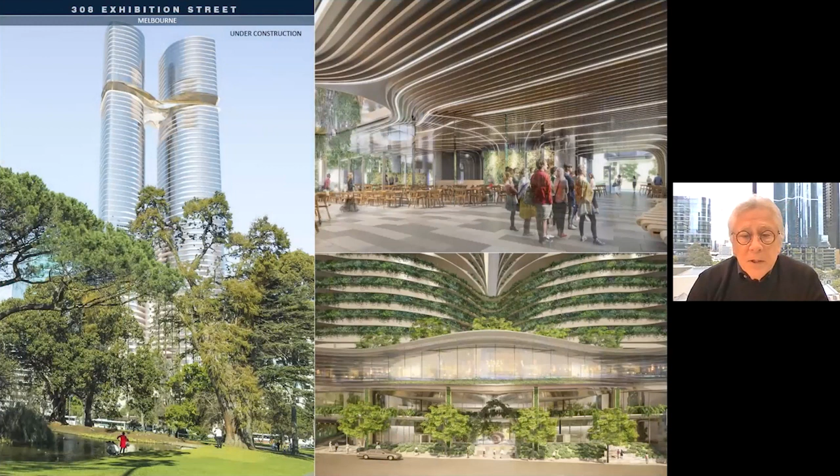Next door to it and behind me is Australia 108, which saves a heritage facade and has a lot of planting to the car parking lower component of the building. It has a sky deck, which gives everybody in the building an equal opportunity for view because it contains all of the public facilities. And another project that we're doing with Cox in Melbourne, again, a lot of attention to the ground plane, a hotel and residential tower.

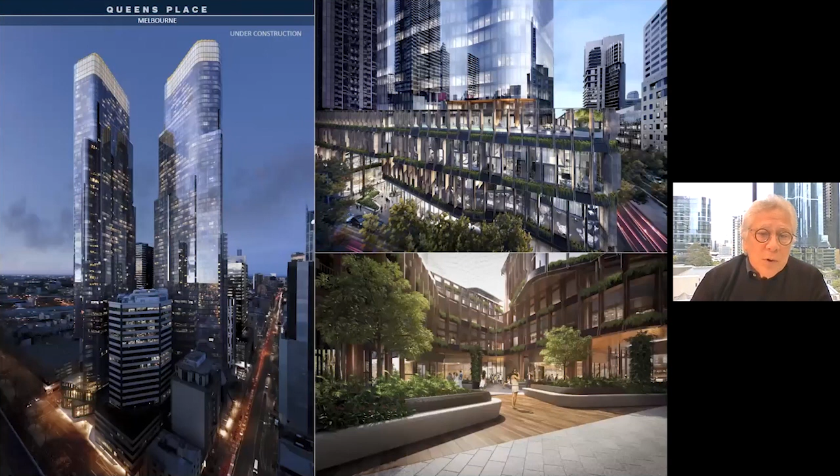And finally, Queens Place, again we're doing this with Cox, they're good friends of ours, and a lot of attention to the ground plane with serviced offices, studio apartments, etc., connecting into the fabric of the city, but creating the skyrise elements which can be seen from afar and which add to the character of the city.

We received the invitation in 2010, and construction actually started in 2014. There's a lot of proximity between Kuala Lumpur and Australia—a 7-hour flight, not too bad overnight, and a 3-hour time difference for calls, etc. So it really was quite an easy process in terms of those sort of logistics.

The city of KL is just quite remarkable. It's an organic city in the road networks, in the way it's evolved. And as Carol just mentioned earlier, some major buildings have now popped up, as it were—the Petronas or KLCC Tower, the KL Tower, an observation telecommunications tower, TRX recently, and our Merdeka 118 on the right-hand side. I think these are characteristic of Malaysia becoming part of the international development of cities.

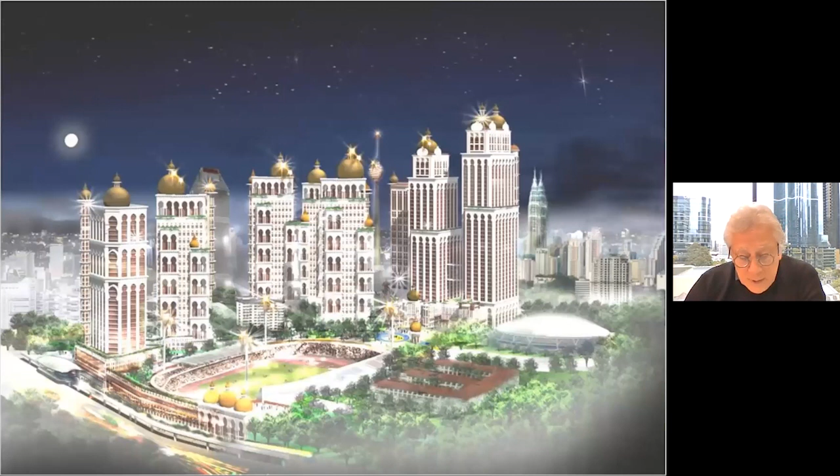And this was it. You can see from this approach, this sort of use of Malaysian Islamic architecture, extruding it from a village campus type of background, was, I suppose, to relate to the heritage of the site.

But really it wasn't so much about providing the potentials of public advantage. You can see the sort of campus layout here.

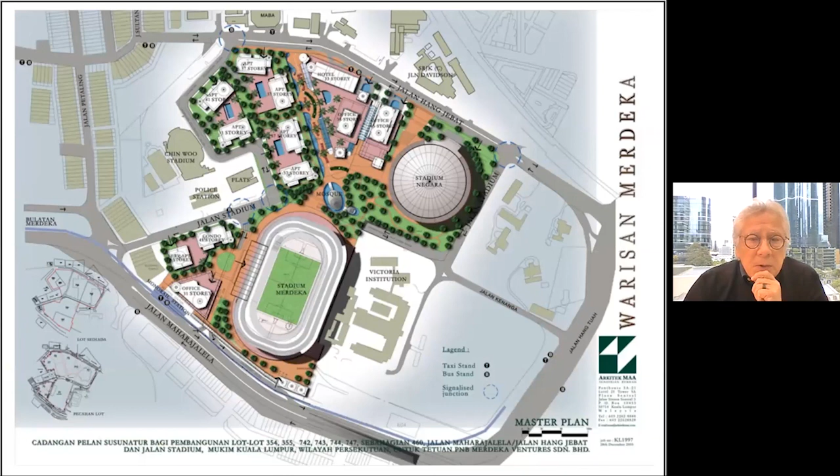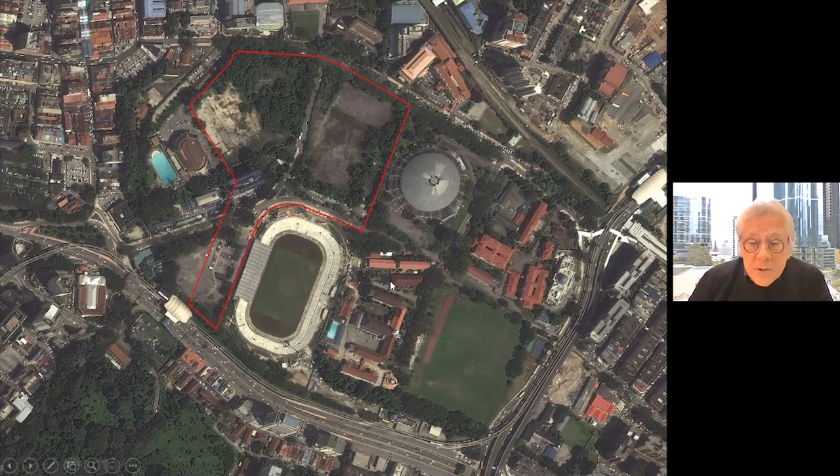So one of the first things we had to do was think about how we could rationalize that, how we could reparcelize the site to allow the type of development that PNB wanted, which was more singular and provided more landscaping and public amenity. It also involved getting rid of this particular building here, which was the main police station. That took a bit of interesting convincing, but we got there.

And then I was informed that in about 6 weeks after my first meeting, I'd be presenting to the Prime Minister, and I needed to present 6 schemes. So 6 schemes, 6 weeks.

All of us architects go through this. We tried different schemes, so that didn't horrify me too much, but we did have to think carefully about how we arranged, where we put the building on the site. And the red dot is where we ended up.

The red dot enabled us to create an axis down along, right down here through the building, which enabled a really compelling kind of public pedestrian route through the site, through the building - an axis like that.

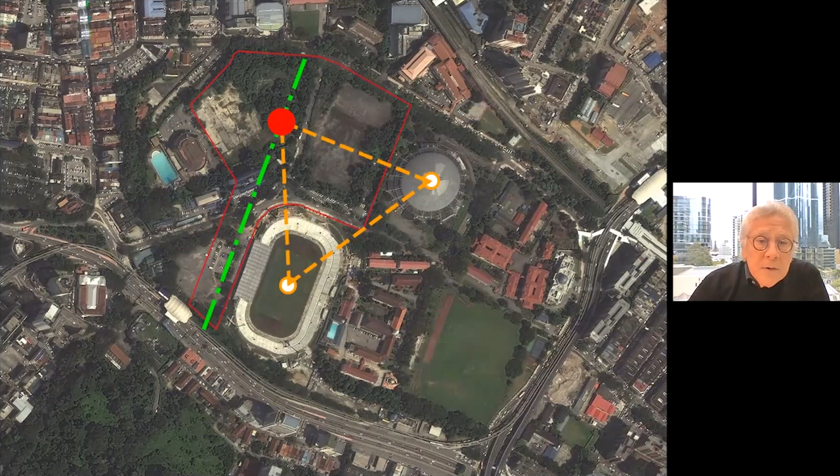And then that's the project as it evolved. Along that axis to the south down here, you'll see there is a park designed by Sasaki out of Boston, a really beautiful water park, a cooling place, and a front door to Stadium Merdeka at last.

Then up here is the tower. This is the podium through here, with an around 88-meter diameter tessellated self-supporting glass dome, which paid homage to the dome that exists on top of Stadium Negara.

So it started to create quite a compelling diagram on the site for us, and it started to work with the way the land could be utilized from there.

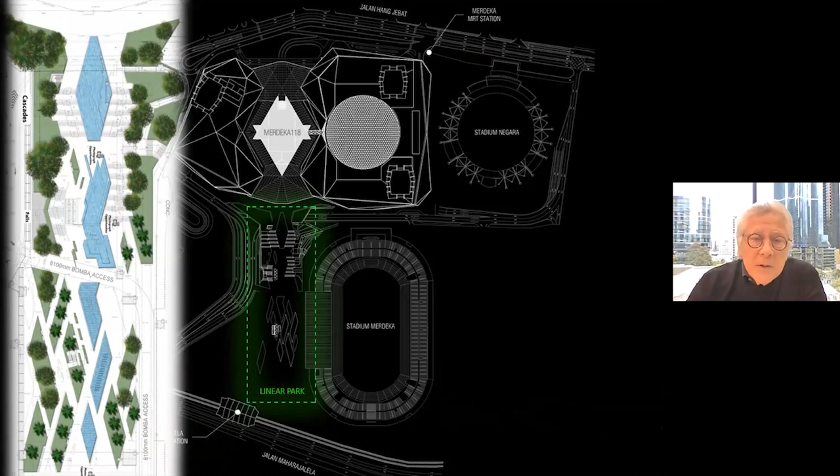So these projects, I think, have a responsibility to find ways to be more than just themselves, to really fund these sort of public advantages.

Just a little rendering of down in Sasaki's park, some of the water features and how they relate to our tower. This is the south elevation of the tower.

It's a crystalline form. It looks quite sculptural, but actually it wasn't too difficult to extrude. It wasn't torturous - it was just a simple manipulation of the floor plates to create these angled facets.

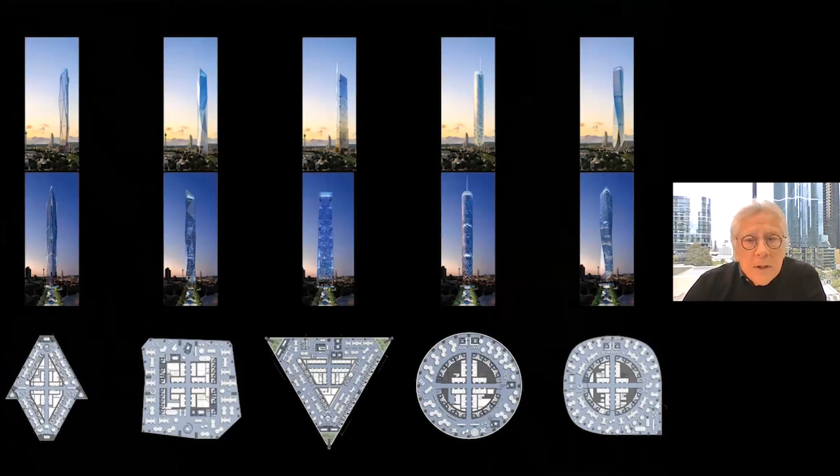The 5 schemes, yeah, well, we went back to the essentials. This was really for the presentation to the Prime Minister. We did our crystal on the left, we did a square, a triangle, a cylinder, and on the right, a twisting building, just to cover a range of buildings.

In our own processes, we'd come to the view that the diamond on the left-hand side was going to be the most appropriate tower form for this site, for a number of reasons. So the challenge really was in the presentation to take the Prime Minister through all of these and have him agree with us, which fortunately he did.

So we had a sculptural and crystalline shape. The way that this building had to fit into the local context was inspired by the songket patterns, the Malaysian materials that are threaded with silver thread.

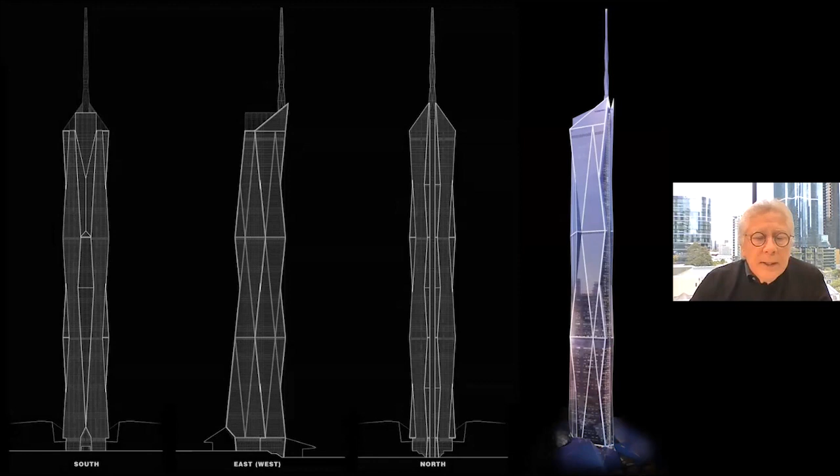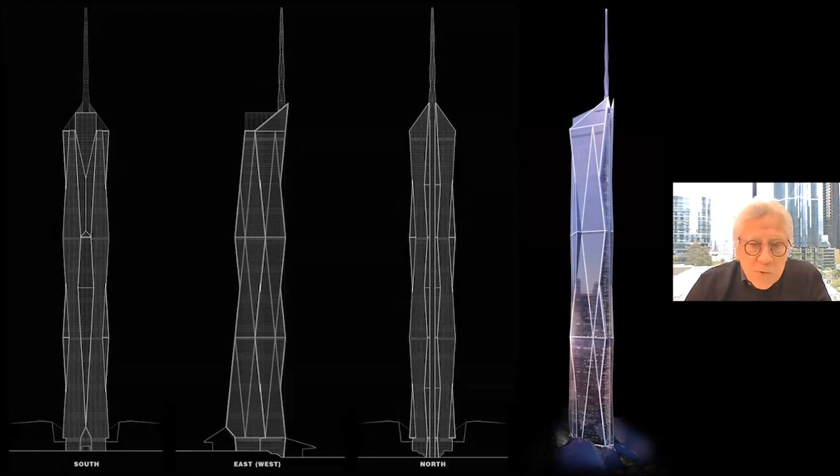These diagrams just show the geometric form that the building took. The east-west elevation shows how it expands as it comes to ground. It spreads its feet and its bulk and anchors the building, and it looks appropriate visually, and it also created a tremendous 30-odd story atrium inside, which helps the flow of air through the building.

And the north elevation, the vertical pathway up the center of the building, is actually where two glass bullet elevators run from ground to the sky deck. They are two-story elevators.

The section through the building, you can see on the right, you start to see the belt truss zones. The GFA is just under 300,000 square meters, with 87 elevators, 57 of which are in the core of the tower. The rest are transit elevators which connect car parking, etc. There are also 18,000 facade panels and 8 kilometers of facade lighting. Should be quite a light show.

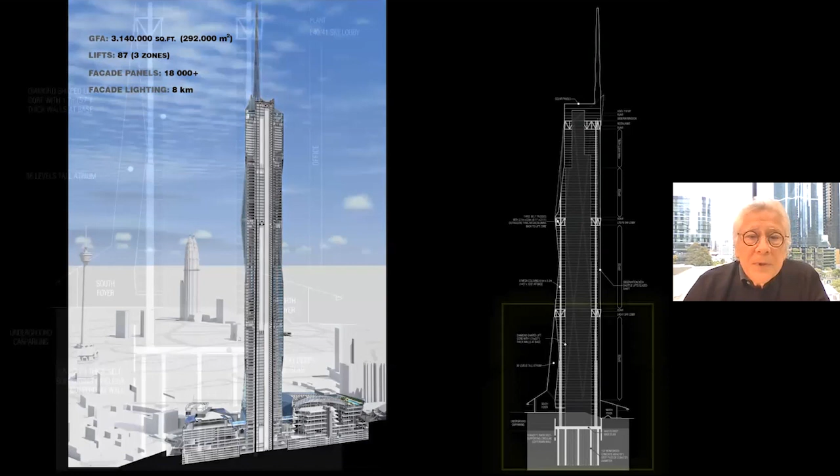If we look at the bottom section of the tower, diagrammatically on the left, the cofferdam is about 100 meters in diameter. The wall was about 0.8 meters thick, and it was 20 meters deep.

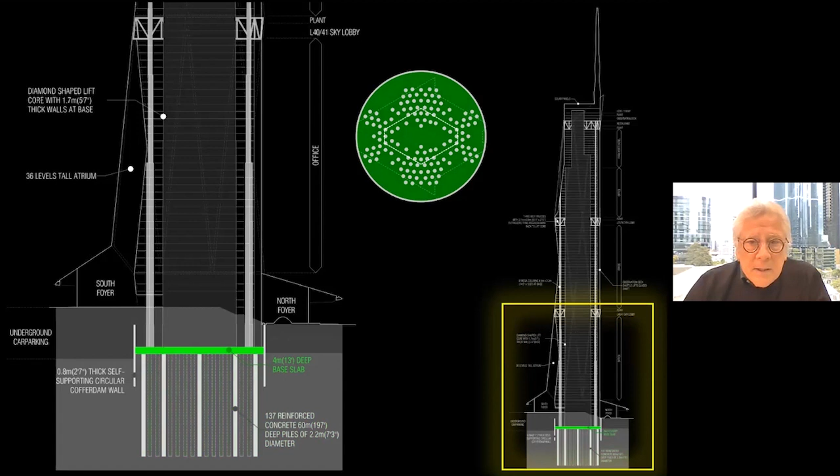And then within the cofferdam, there were 137 piles, 2.2 meters in diameter, that went down 60 meters, and they supported a raft 4 meters deep, actually poured in three sections — the section under the tower and then the two hemispheres on each side — so that they could be poured in one go, with very strong and complex joining junctions between those 4 meter rafts.

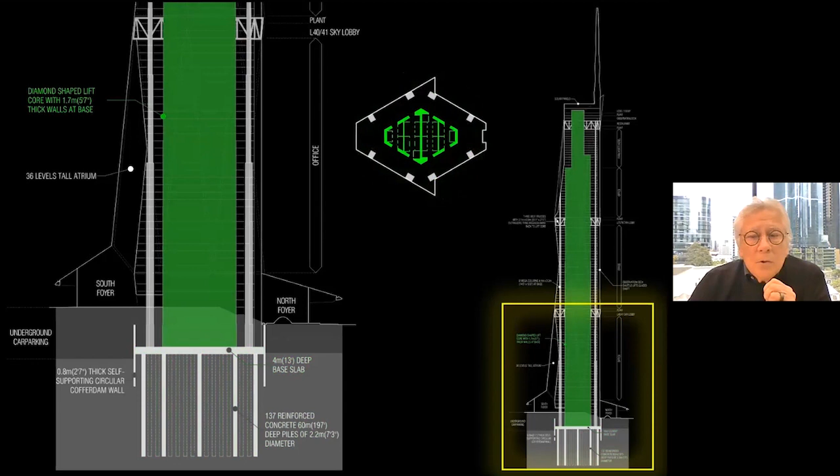The core is diamond shaped, and it creates a 12 meter lease span, so quite an ideal floor plate for office work. And then there are 8 mega columns.

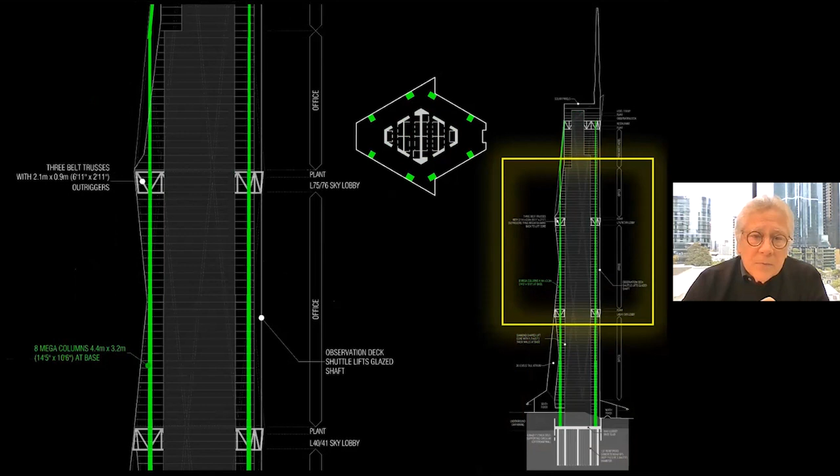They're huge. They're bigger than a lot of rooms in Melbourne. They're not really going to fall down. They are incredibly strong, incredibly highly reinforced. The steel in them is a wonder.

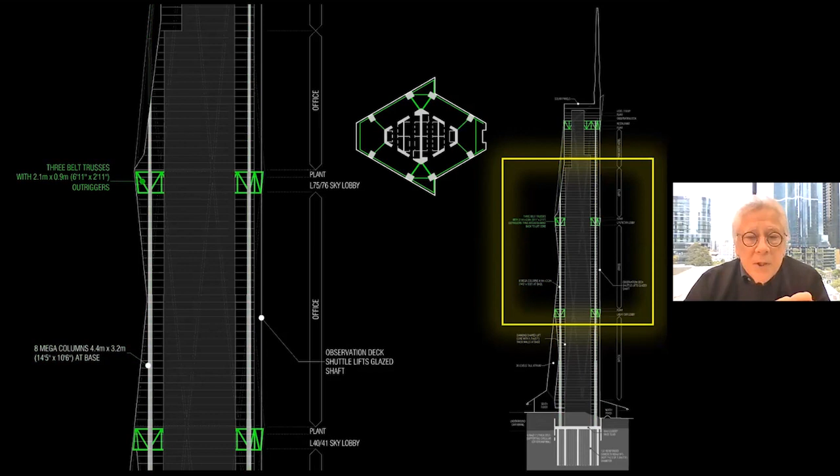And they are connected to the core by the outriggers, which in turn are junctioned to the mega columns, which in turn pick up the belt trusses around the perimeter of the building, which you can see in this terrific diagram here. The belt trusses then support perimeter columns, and so this structural system actually allows for alternate pathways in the case of structural trauma to the building through some incident or another.

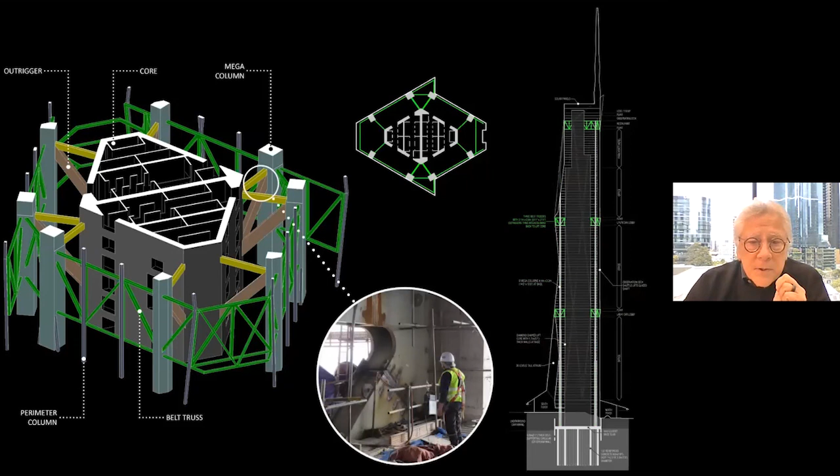The steel is also mind-boggling. This is standing at the top of one of the outriggers. The steel plate on that outrigger is 100 millimeters thick, welded componentry, and it's three stories tall.

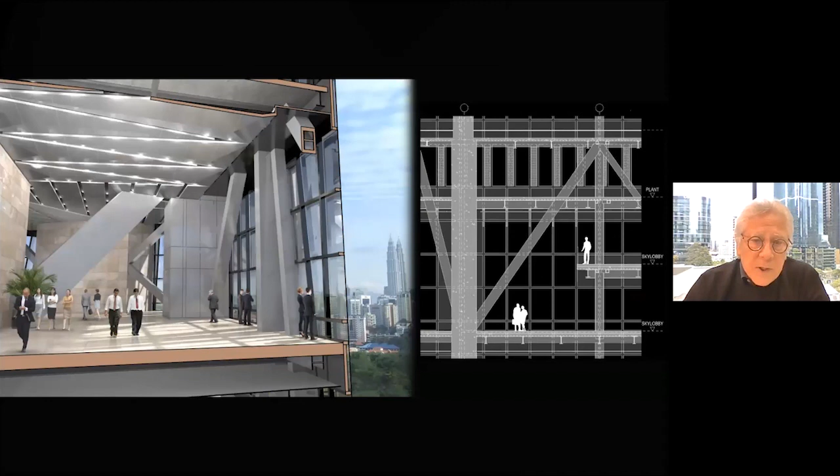Those belt truss zones then become the transit zones for elevator crossover. They're a great look into the structure of the building. They're very interesting, very sculptural, and probably my favorite spaces.

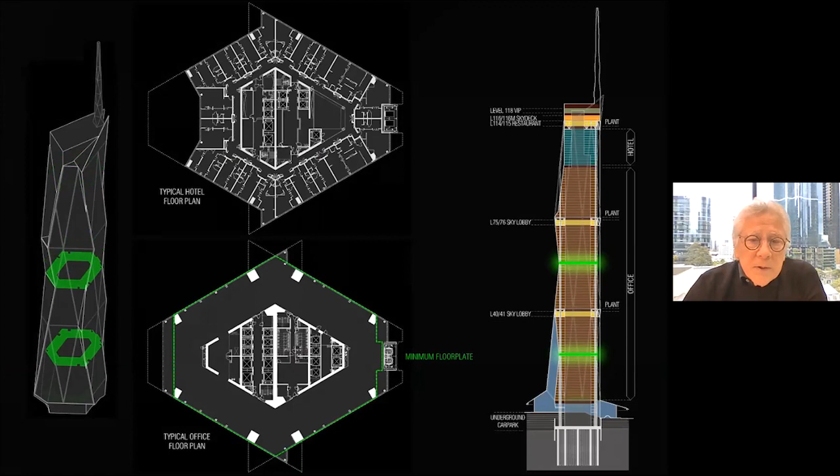The office floor plates are typically around 2,300 square meters GFA, but they expand and contract. There's a minimum and a maximum floor plate, but they're around 2,300 square meters. The hotel floors have 20 rooms per floor, about 16 stories.

The top of the building erodes out to give it a sculptural termination. The office floors have no intermediate columns, but the services, electrics, air conditioning, etc. are all floor loaded, which is a very good way of providing comfort in the offices.

The hotel rooms were designed by GA Design out of London. There's 16 levels, 250 keys, Park Hyatt, with beautiful views around Kuala Lumpur. The hotel reception is on level 75.

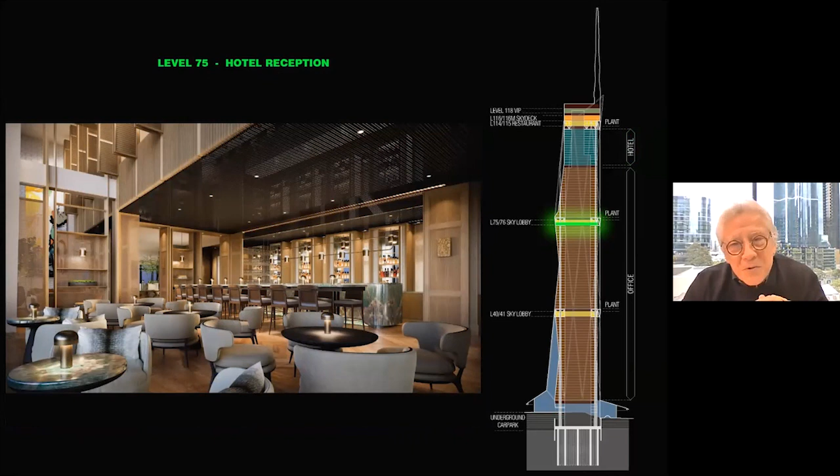So you enter at the ground floor, take the transit elevator up to level 75, where hotel reception is. And then, unlike some hotels which always confuses me and others, you don't travel down, you then travel up to the hotel rooms from there.

On top, levels 116 and 116 mezzanine, is the sky deck, voluminous, with great views. You arrive on level 115 through the glass observation deck via observation elevators. They travel at 8 meters a second, a little bit slow, just to allow you to enjoy one minute of riding as you get from ground to the observation deck.

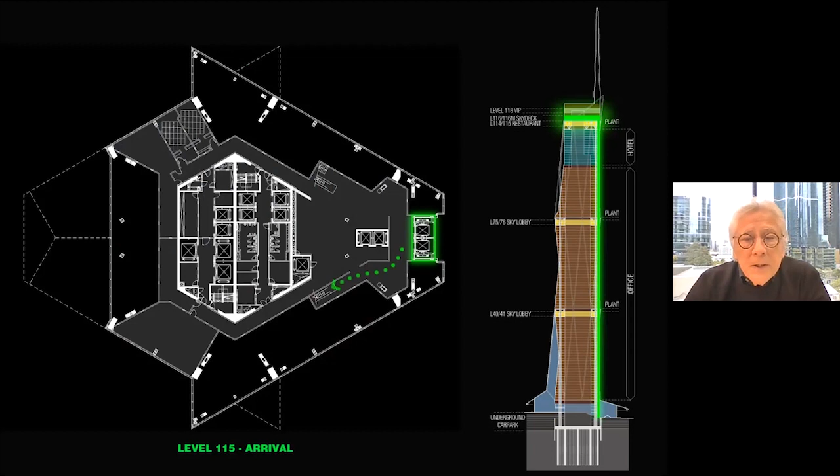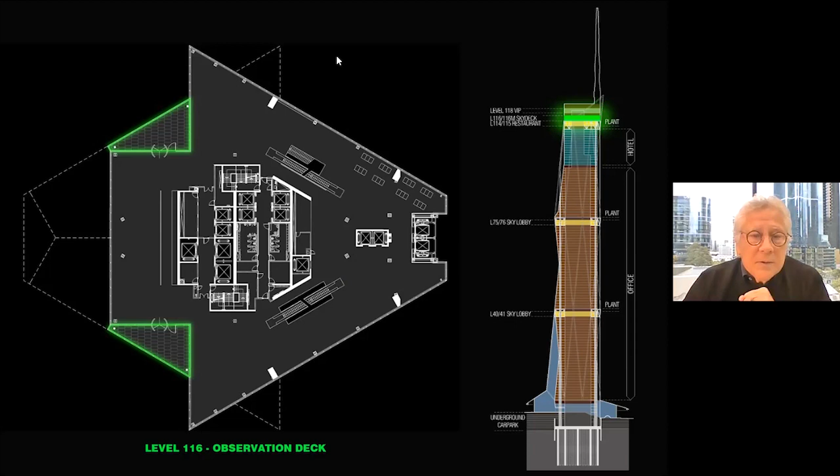You go up escalators to the themed observation deck, and above that on the mezzanine is an outdoor area. So up at over 600 meters or something, you can taste the air. The observation deck above is where the thrills are, so stay tuned to that—it should be quite interesting when it's completed.

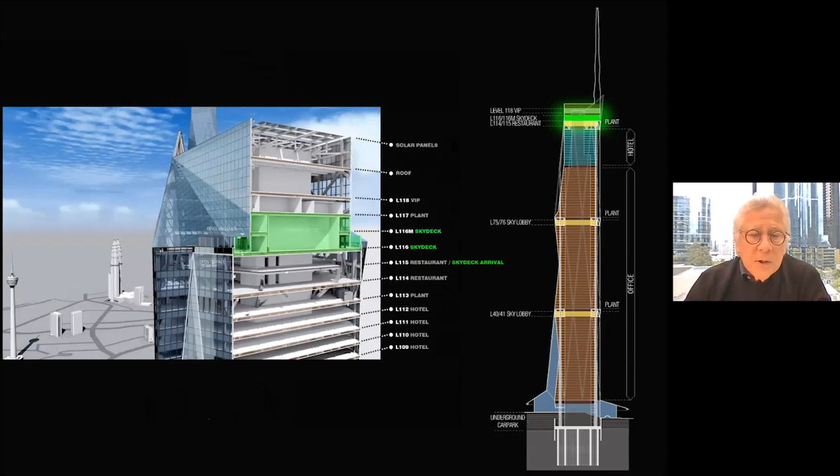A section just to show you how the sky deck works. It's got restaurants underneath. The elevators on the outside are two-story: the lowest story delivers to the restaurant, and the upper story delivers to the sky deck.

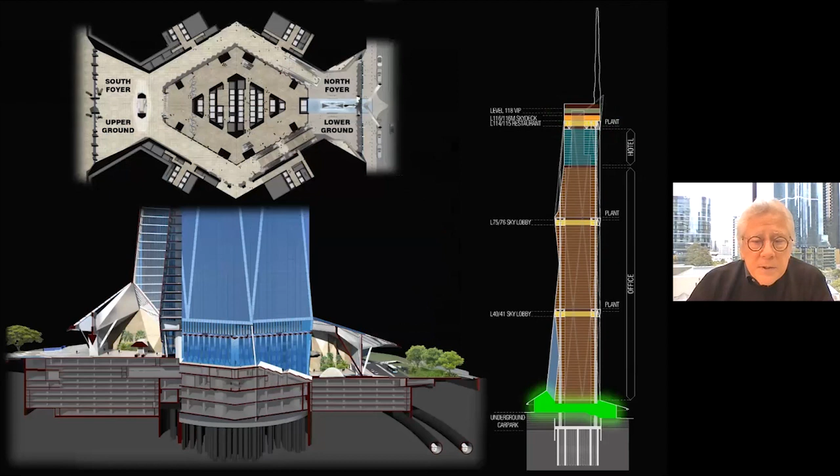Now this is going to the bottom of the building. The bottom of the building is all atrium. On the right-hand side it addresses Jalan Hang Jebat, and on the left-hand side it addresses Jalan Maharaja Lela via the Sasaki Linear Park. There's about 10 meters difference in height between them.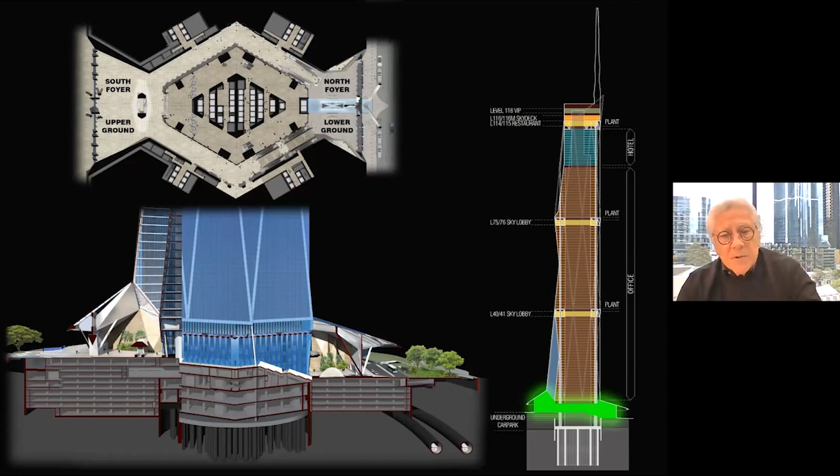The foyer on the right-hand side is separated by a water feature by Fluidity, designed by Fluidity out of LA, but it's one big holistic space. So as you enter, it's not actually entering the hotel yet—it's still part of the journey from outside to inside, through to the vertical rise to the hotel floor, reception on level 75.

On the left-hand, bottom side, the commercial lobby has an escalator and stair system that takes you to retail and to the formal linear park lobby on the left.

So this is the drop-off to the building. It has a huge skylight, so as you drop off to go into either the hotel or the commercial space, you can actually look up and see the tower above you, getting a sense of that place.

And then the interiors—these were really interesting. How do we make the right space? It's hot and humid outside a lot of the time, it can be raining. We wanted to provide a cooling environment, kind of awe-inspiring as well, and an environment that was appropriately scaled to the height and presence of the building.

So we were quite taken by the caves in Malaysia. These caves have water on the walls, they have planting, they have light cascading down. And so that led us to interiors that are totally cut, as it were, out of stone, out of travertine.

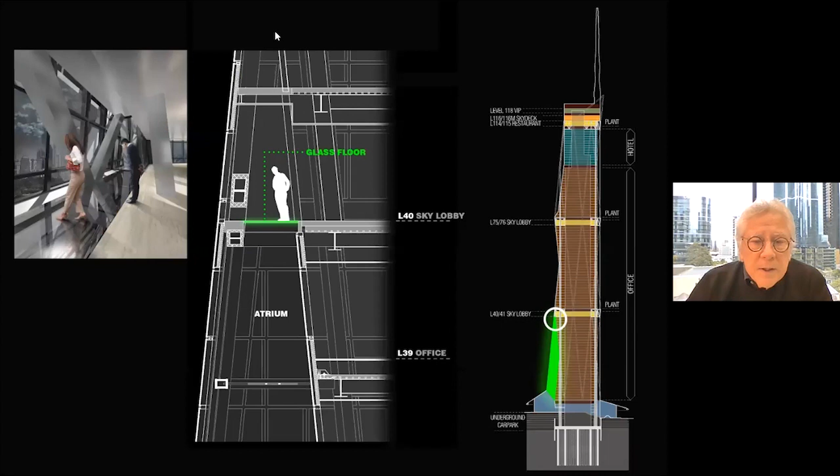actually stand on it and look down into the atrium 30 odd stories below, if you're game enough. And this, again, here is the building from the south. Crystalline, sculptural, simple, and a nice, we thought, respectful counterpoint to the Petronas Towers in the distance and the KL Tower on the left.

The podium is quite large. It's about 200 meters long, but it's very perforated. The public can come into this under shelter from the whole way around the perimeter of the podium. So all the red arrows you can see are accessible by the public.

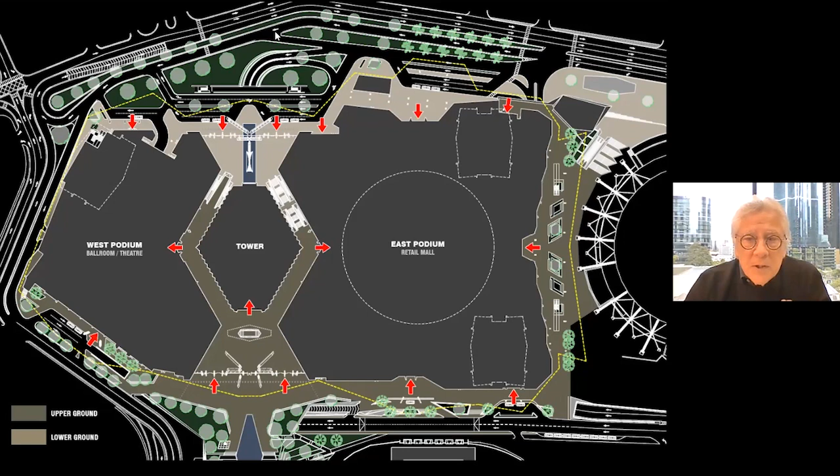And the podium also, if you can see the yellow dotted line, it hangs out over the building. So people can circulate around the perimeter of the building and stay dry if there's one of those often typical Malaysian or Kuala Lumpur downpours, which I've certainly been caught in, as no doubt some of you all have as well at times. So it's about providing a level of comfort and amenity for the pedestrians.

Looking down on the podium, the podium is peeled back to form crevices that are filled with gardens. The gardens are for parts of the tower activities, for the residential activities, and parts of the podium actually touch the ground, so that it provides a very interesting pedestrian experience, and it highlights some of the entry points.

If we peel that back, we can see a section through the retail at 7 levels. This is the glass tessellated dome in homage to the dome of Stadium Negara. It's a glass dome which allows light to come down into the depths of the retail, and also when you're in the other levels, lower levels of the retail, provide a draw upwards.

Once you are in the higher reaches, you can actually see the tower from the retail. The retail, by the way, was planned by Buchan out of Melbourne.

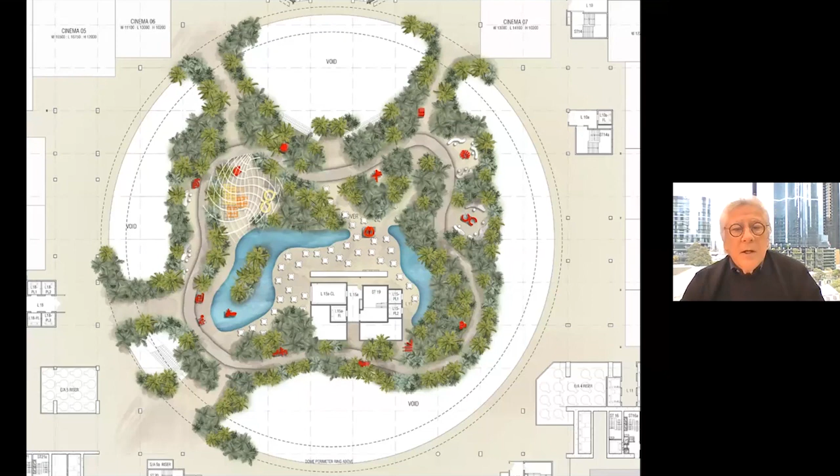And the top deck was just an idea about how we could do something that was quite remarkable up in this space. In this case, this was looking at a forest, a restaurant, sculpture, and some IT effects. That's still being worked on, but the idea is that that becomes a very, very strong attractor so that people will want to take that vertical journey to the top of the retail.

Now, on the eastern side of the tower, the podium lifts its skirt, as it were, to create an indoor-outdoor space for what we call a food street. And that sits opposite Stadium Negara on the right. Stadium Negara is the circle on the bottom of this drawing, will be renovated into a performance space. And Negara Place is the outdoor restaurant.

And you can see the rhomboid shapes are actually penetrations through which allow trees to go through and light to go down into drop-off areas for the residential and serviced apartments.

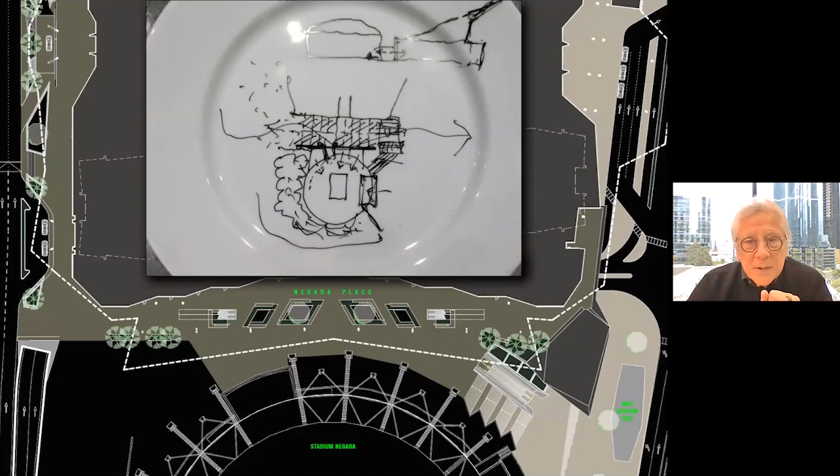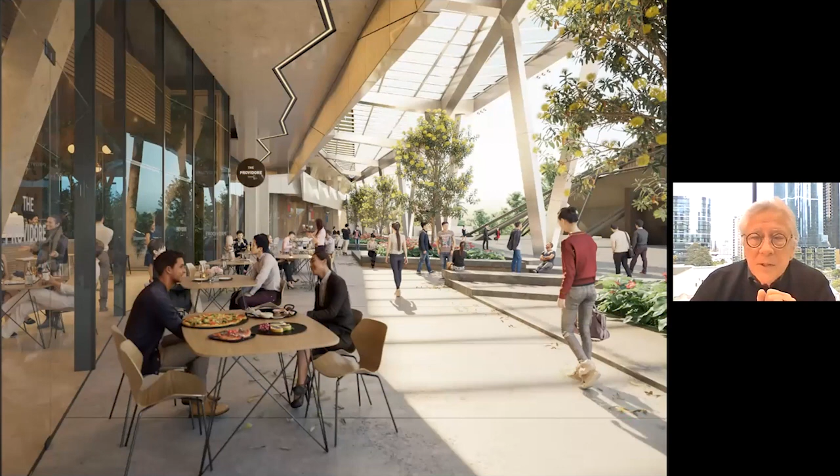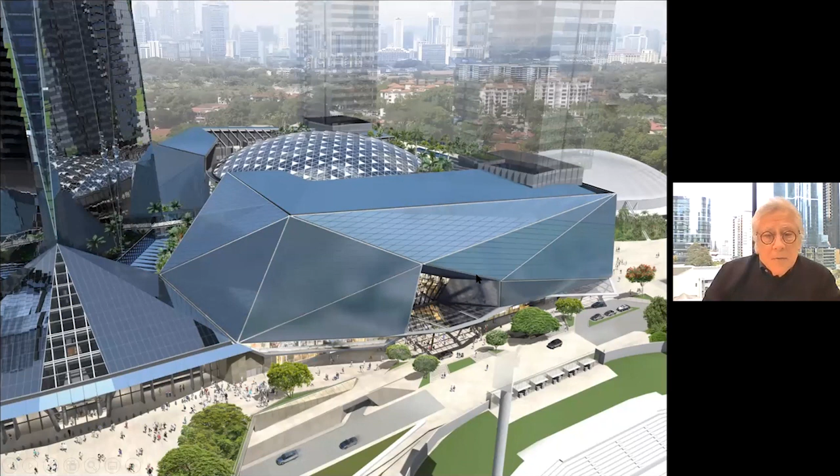And here we have, from underneath the shelter, looking back at Stadium Negara on the right. On the south, on the left-hand side, we have got the entry, the upper podium entry, and this entry here is the entry to the retail. You can see that through the fold here, you can navigate your way around the building under shelter.

This little bridge is an experience for the public with respect to the gardens. It's the bridge that actually takes you from the sky deck to the retail podium, to the food and beverage level. It's, as you can see here, crosses over and looks down onto the roof gardens.

And here you see the gills, the service gills for all the plant and equipment, and some of the other gardens on the roof. We're now, I'm going to go really fast because I'm running out of time.

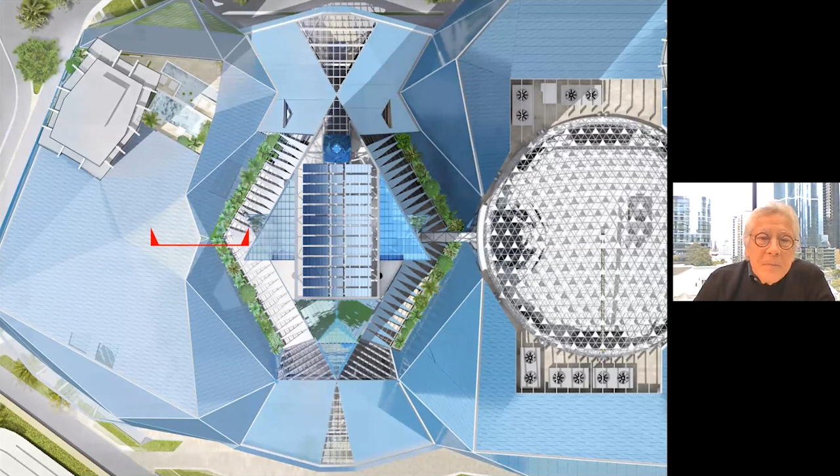The wellness centre in the podium for all the people working in the place, the wellness centre with great views outside. Contributions, yes, the building has to be sustainable. It's LEED Platinum, with very many ways of making this very sustainable.

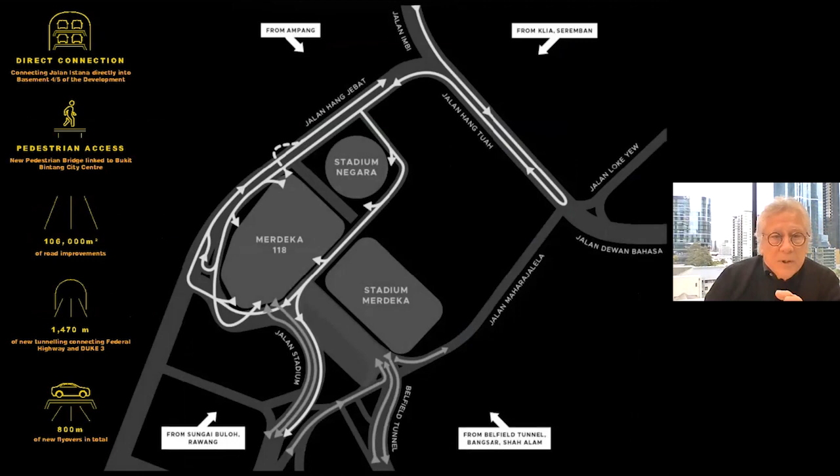We have a lot of public infrastructure work that's been done, from tunnels to footbridges to overpasses, etc.

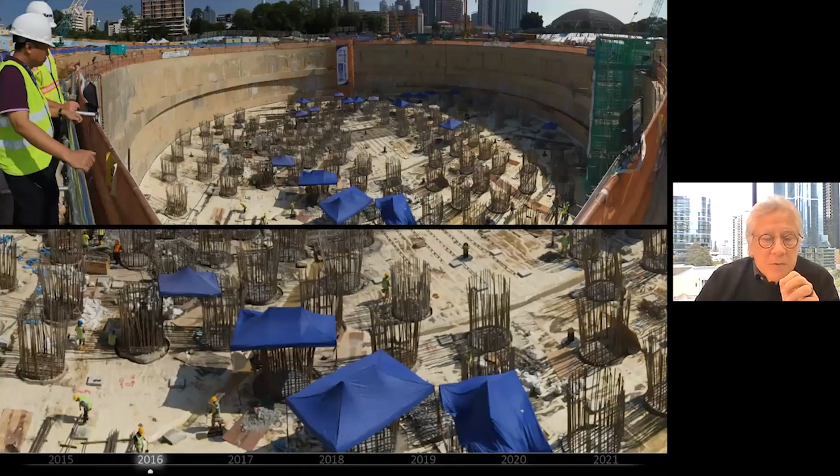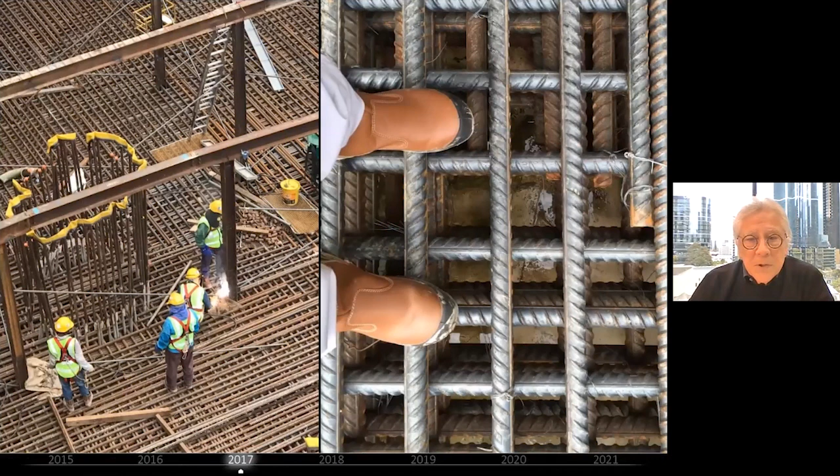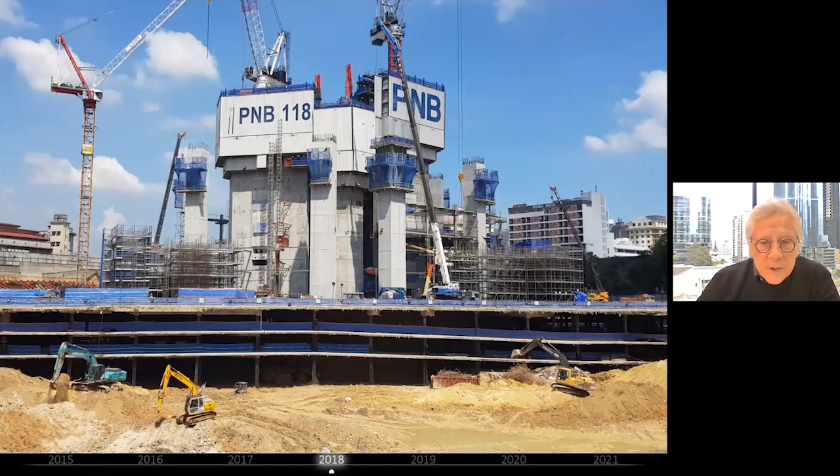Then into construction. In 2015, the excavations started, a 100-metre diameter coffer dam. Here we are in 2016, looking down at the piles, ready for the raft slab to be poured. An amazing amount of steel - the bottom steel was, I think, 12 layers of 40-millimetre diameter steel. Here is the building starting to, in 2018, come out of the ground.

You can see the scale of that when you look at the excavation equipment. The building starting to be clad.

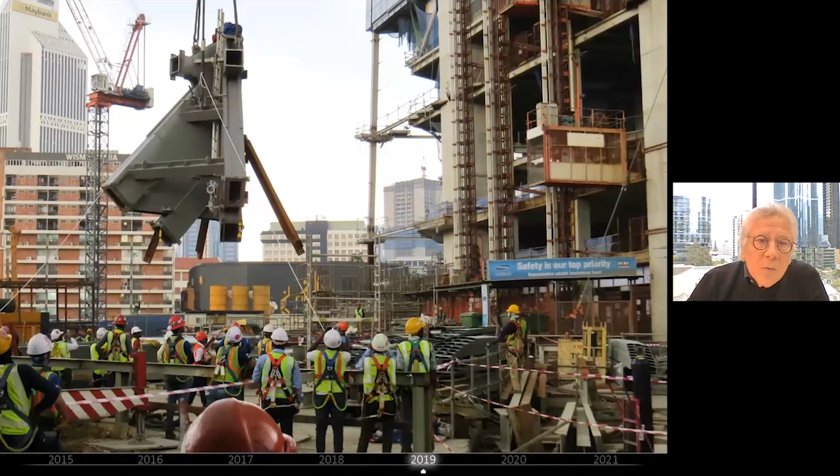Major pieces of steel engineering structure - this is the node point at the top of the southern atrium roof, which you can see the scale of when you highlight the people working on it.

Gerard van Beek is our project architect that's lived in KL during the construction to coordinate design, enjoying the view, which is quite magnificent. The building taking shape as we look up the northern facade, which has the observation deck elevators.

And me - this is not about me. This is to show you how 2 hours on the site affected me. I went on the site many times until COVID. I've come off the site after 2 hours exhausted, hot, my shirt absolutely saturated, and it just leads me to pay homage to the workers.

There's up to 3,000 workers on this site. They all look a bit strange at me because they're wondering what I'm doing. But 3,000 workers who are properly fed and looked after at break times, having to deal with the logistics of the elevators to take them to and from. We've had 40 million working hours on this site, and to date, touch wood, there is no major incident or major accident. So yes, here's to the workers.

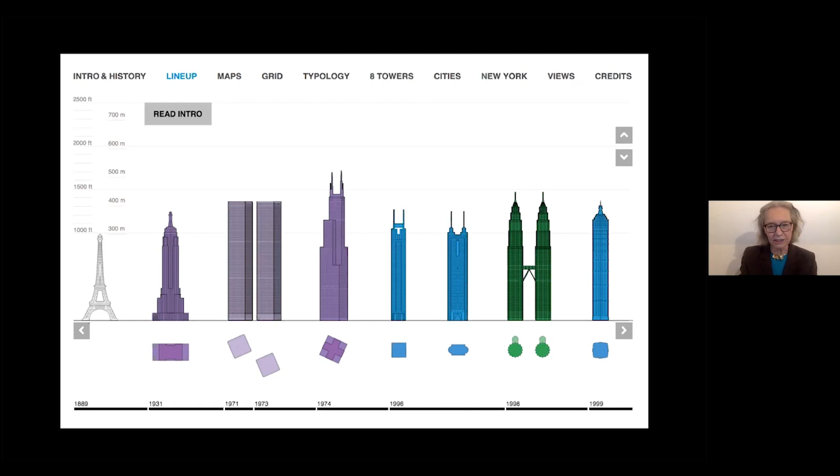In the first segment that shows us the 20th century buildings, from the Empire State Building, which establishes the skyscraper museum definition of super tall—380 meters, not the lower 300 meters, which is represented by the Eiffel Tower, a 19th century structure. You see the Petronas Towers in green stretching up above the roof height of the Sears Tower in the purple North American buildings. So this idea of worldview we're really exploring across the series, with the architects who are the leaders of the team of the extraordinarily large number of professionals brought into the project of building a super tall skyscraper.

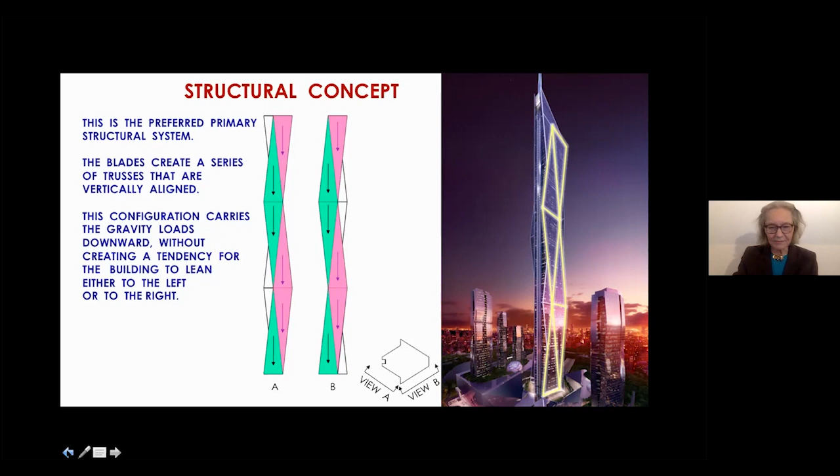We want to pay special homage and send our love to SawTeen, as many of you know that Les Robertson passed away just about 2 weeks ago, and both Les and SawTeen were designers on the Merdeka project. I think Karl wants to pay a special kind of homage to their work, and in the case of Les, to his life as one of the world's great and most brilliant structural engineers, and a really great human being as well—someone I was privileged to call a friend for a couple of decades, and from whom I learned an enormous amount about skyscrapers, design, construction, and as Les would always say, buildability.

So I'm going to ask Karl to come onto the screen as I give him a brief introduction. Karl will show us some of his extraordinary tall buildings in Australia, because he's a Melbourne native, or Melbourne-based architect, where his firm Fender Katsalidis has been working for several decades on the Australian scene. It's partly because he was considered a regional architect in Malaysia that he won this extraordinary commission.